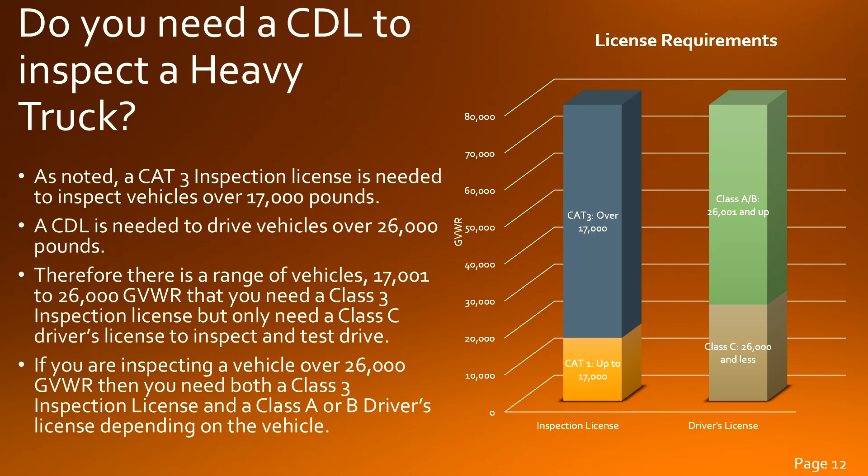In addition to having to have a CDL, there are also clarifications regarding endorsements. Notice what it says in the manual: the inspection mechanic shall have a valid driver's license for each class of vehicle which the mechanic will inspect, except that a certified mechanic who inspects a school bus is not required to hold a school bus driver endorsement. So, for example, if you're inspecting a school bus, you will need to have a bus endorsement, a passenger bus, but you do not have to have a school bus endorsement because there will not be school students on it when you're inspecting it.

But there are other examples where, an empty tanker trailer, if it's still placarded, you would need to have that hazmat endorsement as well as a tank endorsement. Bulletin 19-07, which was from 2019, and a more recent one, Bulletin 25-04, provide further clarification about this.

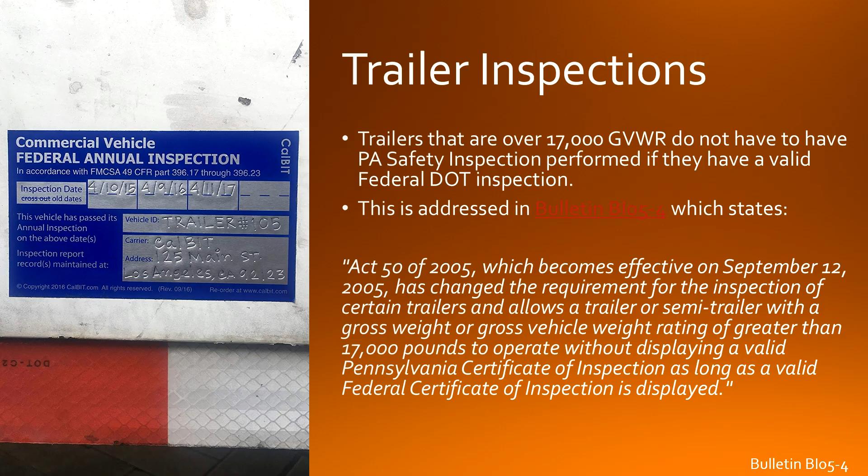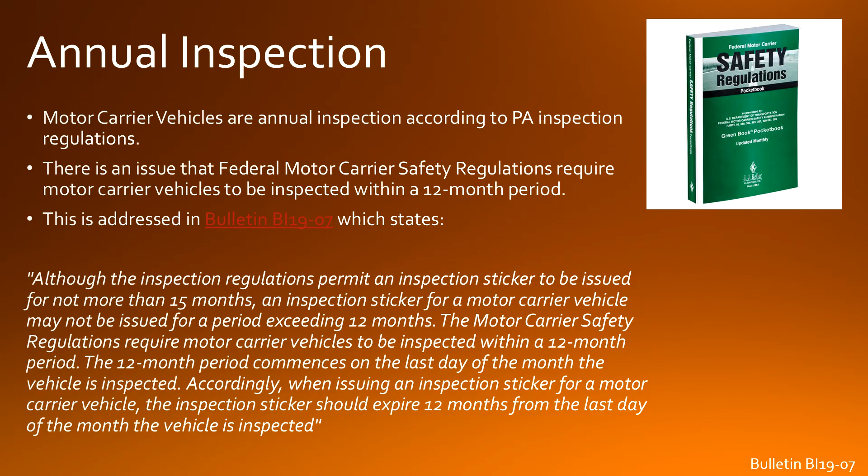There's also another tricky thing in there with that. Our inspection allows vehicles to be inspected up to 3 months ahead of time, which for a passenger car allows it to be inspected as long as 15 months. The wording is a little bit the same for heavy trucks, but there is a federal regulation that supersedes it, and that's the motor carrier regulations, which require that our motor carrier vehicles, aka heavy trucks, be inspected every 12 months. So even though our PA law would seem to allow doing it up to 3 months early and being able to give a 15-month sticker for any motor carrier vehicle, which would be a heavy truck over 17,000 pounds, it can only be inspected for a maximum of a 12-month period. So whatever month you're inspecting it in, that is the same month it will expire a year later.

The majority of the inspection requirements for our Cat 3 vehicles is found in Subchapter F. If you're studying for the test, that's where you're going to want to spend most of your time. That applies to medium and heavy trucks, buses, and school buses. Just like other subchapters, there are two sections to it.

It begins with equipment requirements from page 43 to 51. Those are the regulations that the vehicle must meet to drive on roadways in Pennsylvania. They're enforced by police, law enforcement officers, DOT officers. The inspection procedure, what the mechanic is going to be performing when it comes in for inspection, begins on page 51 and continues to the end of the subchapter. Those are the reject-if criteria that the inspector or mechanic is going to check for.

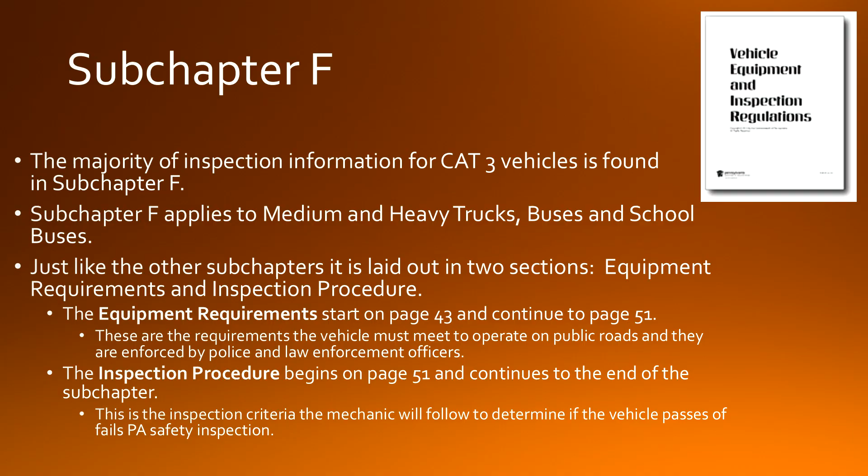It is noted too that you should be following that in order. That was in one of the most recent PA inspection bulletins, that you should start with verifying the ownership and the proof of financial responsibility or insurance, and you would end with the road test. So try to follow it in the order laid out in that chapter.

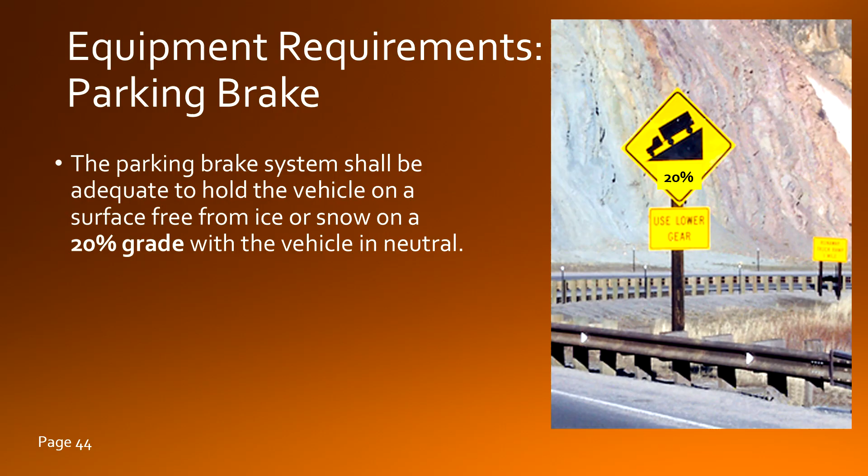We're only going to be hitting the highlights, some of the things that are different for our vehicles. On page 44, in equipment requirements, you can see it has a requirement for the parking brake. It says the parking brake shall be adequate to hold the vehicle on a surface free from ice or snow on a 20% grade with the vehicle in neutral. So that's how we check our parking brake. We don't apply it at any given speed. It's saying that if it's a truck on a 20% grade, which is relatively steep, in neutral, not in park, the brake should be sufficient to hold it.

There's also wording on page 44 that in the current edition of the manual is still incorrect. If you want to make this correction in the book, it currently reads that a tire may be equipped. It should actually say that it may not be equipped. That's how it's worded with passenger cars and all the other vehicles. They omitted the word 'not' in the more recent editions. Even though we don't often see studded tires on our heavy trucks, they may not be equipped with studded tires that exceed, with projections exceeding 2/32 inch. So they can be sticking out 1/32 or up to 2/32, but they cannot stick out beyond that.

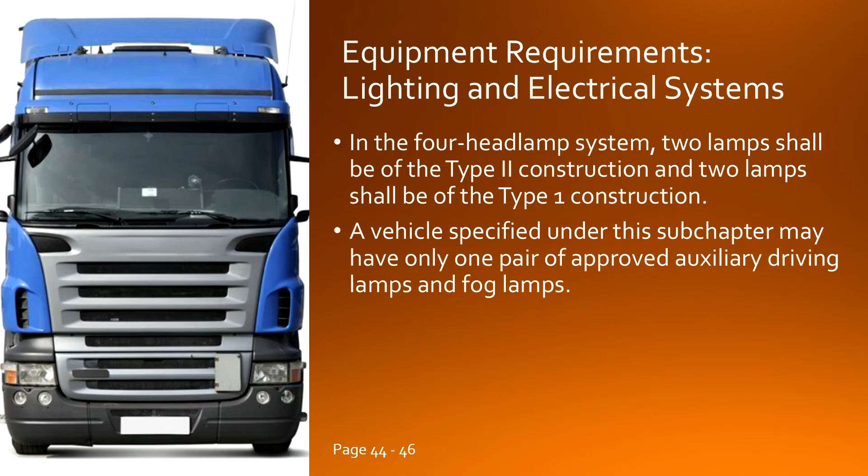In the lighting and electrical requirements, it talks about the headlamp system. If it's a 4 headlamp system, 2 lamps shall be of the type 2 construction, 2 lamps shall be of the type 1 construction. Back in the appendix of the manual, it addresses what those different lights look like. It also says a vehicle like this can only have 1 pair of approved auxiliary driving lights and fog lamps. So you can't have 4 fog lamps across the bottom; you could only have 2 fog lamps and 2 auxiliary driving lamps in addition to the headlights.

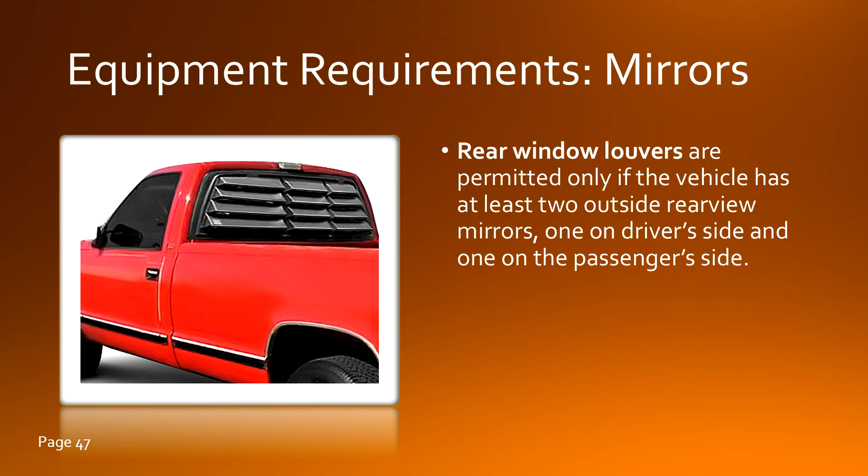There's wording about a wood plank bumper when it comes under the chassis. Wood plank bumpers would only be permitted on a road service truck or wrecker, and even then they should be attached to either a regular bumper or equivalent steel backing. They should not solely be wood.

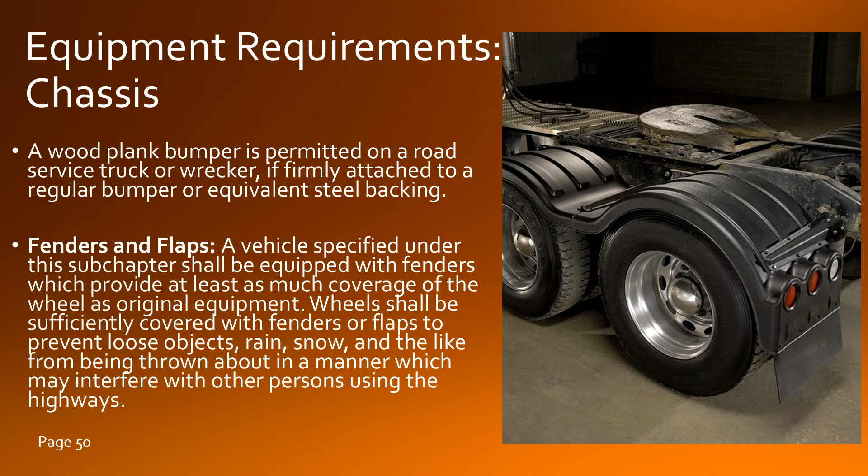There is requirements for fenders and flaps. In this picture, we can see fenders placed on a heavy truck. A vehicle in this subchapter needs to have wheels sufficiently covered with fenders or flaps to prevent loose objects, rain, snow, and the like from being thrown out on the highway or on other vehicles. There is a requirement for it. If you look at the rear wheel shields on page 51, it says a vehicle specified in this subchapter, except the truck tractor while towing a trailer, because the trailer is essentially going to block that same thing.

If it's bobtailing, it would need this though. Shall be constructed or equipped with mud flaps or wheel shields to bar water or other road surface substances thrown from the rear wheels of the vehicle or combination at tangents exceeding 22.5 degrees, measured from the road surface, from passing a straight line to the rear of the vehicle or combination.

So this picture hopefully clarifies it for you. What they're talking about is a 22.5 degree angle coming off the back of that tire, and you kind of project a line from that. So the closer the mud flap is to the wheel, the further it has to come down to catch anything that would come off at 22.5 or greater angle.

Some flatbed trucks might stick the body out far enough that it would catch that line and no mud flap is required. So you can see there, depending on my distance from the wheel, the mud flap has to come down and catch that. I have heard a tip that some mechanics have gone to a hardware store or plumbing store and bought a 22-degree angle, maybe for PVC pipe, and stuck two 3 or 4 foot lengths of pipe in either end and lay that next to the wheel.

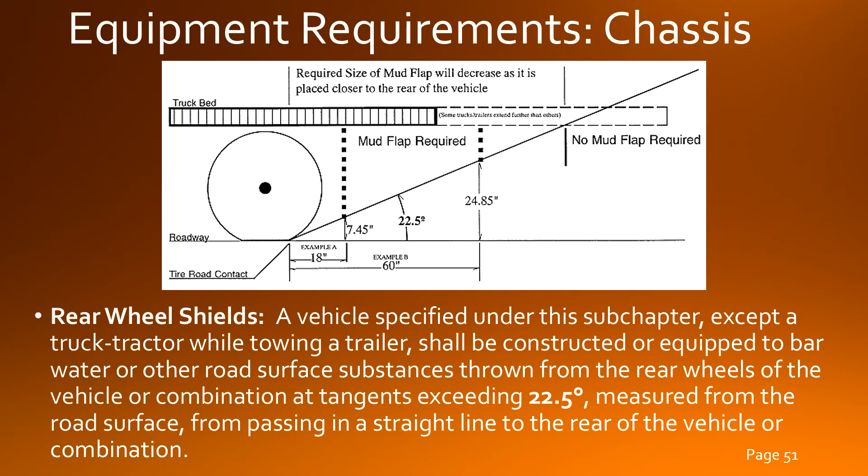Now, a 22-degree bend is actually 22.5 degrees, same as this requirement. If they lay that flat on the ground, they can kind of use that pipe as the projected line and determine if the mud flap falls where it needs to be. There are also other charts where it says, if the mud flap is X amount behind the wheel, it needs to come within this distance of the ground. So you could either use a gauge like I described or reference those charts to check for this.

Now we get to the inspection procedure on page 51. The majority of what you're checking is identical to passenger cars and light trucks. So we're going to try and hit on the highlights that, maybe it's the same wording, but it's checked differently, or it's something unique to our trucks, such as the items regarding air brakes. So we're not covering the entirety of the inspection procedure. We're assuming you already have that level of knowledge. This isn't meant to replace the inspection course. This is meant to only add to it what you need to know for heavy trucks found in Subchapter F.

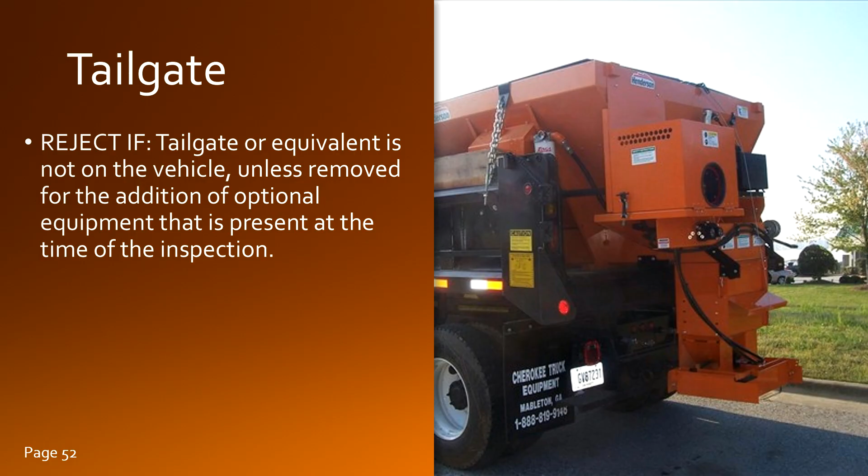First thing on there, on page 52, is the tailgate. It says the tailgate basically needs to be on the vehicle. That would be rejected if it's not on the vehicle, unless it's removed for the addition of optional equipment that's present at the time of inspection. So in this picture, a salt spreader would be a perfect example of that. There's some equipment, maybe a lift gate, that's meant to essentially replace the normal tailgate. If that equipment is present and properly attached, then that does not need the tailgate at that time. Now, if they would remove the salt spreader from the body of this truck, they would need to reinstall the tailgate before it can be driven on the roads or pass PA safety inspection.

For outside mirrors, it states to reject if it does not have a mirror with minimum reflective surface area. So notice that on all of our vehicles over 10,000 pounds, that is 50 square inches. So these vehicles need the larger mirrors. They need to meet that requirement. Not saying you need to measure this and calculate for every mirror. If it looks like the standard normal size that you're used to, it would be acceptable. But if it is smaller or looks questionable, yeah, you're going to have to get a tape measure out and do some math to figure out the surface area.

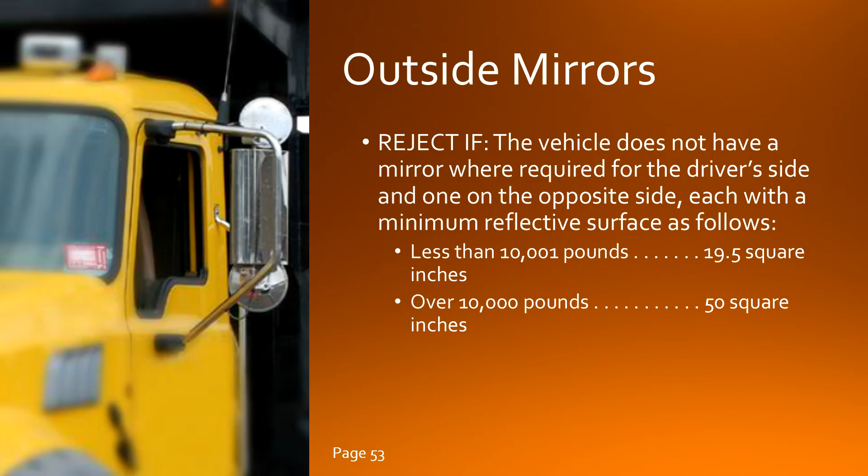Here we're seeing the rear wheel shields, the mud flaps again. We had already seen that in equipment requirements, but here's the reject if. It says if it's not equipped with rear wheel shields or mud flaps as required under PA code. I already explained that PA code basically is looking at a 22.5 degree angle, and anything that would come off at an angle greater than that needs to be caught by the body or the shields or mud flaps. Notice it goes on to say that there cannot be any lamps or wiring attached to any guard or flap. We're talking about not the bracket, but the part that swings. There can't be lights on the bottom or any wires zip tied to it. And the guard or flap has to be of suitable strength.

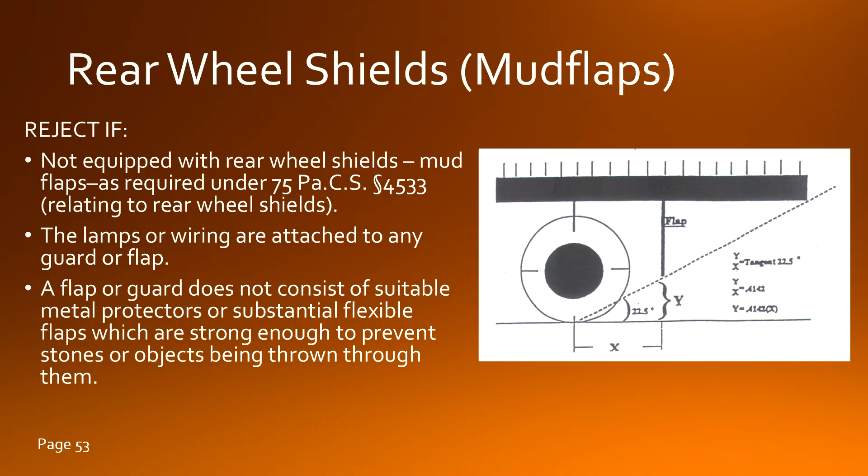Notice it says reject if it does not consist of suitable metal protectors or substantial flexible flaps strong enough to prevent stones or objects from being thrown through them. This doesn't mean the mud flap cannot be a mesh material. Some are a really tight mesh that allow water or wind through but will catch any rocks or objects thrown through. But you can't have cardboard or a rag or a mud flap with large holes that won't catch objects.

On buses, they have some special criteria applicable to their handrails. Now, I know you may not be planning on inspecting buses, but understand that your license will permit you to do this, so you need to be familiar with these requirements.

It says reject if the step well is cluttered or worn to present a tripping hazard. So where they get onto the bus, there can't be a box, a lost and found, or the metal protectors or rubber mat presenting a tripping hazard, can't have holes in it or something that'll trip people up.

It goes on to say the guardrails or grab rails can't be loose or have fastening parts missing, so there can't be any screws missing. They have to be secure.

The service doors cannot bind, jam, or malfunction, preventing proper operation. They basically have to work smoothly, work freely.

The emergency exit is not easily accessible -- again, they can't have a large box or lost and found or something stored in the way of the emergency exit. They can't have an additional seat added blocking it.

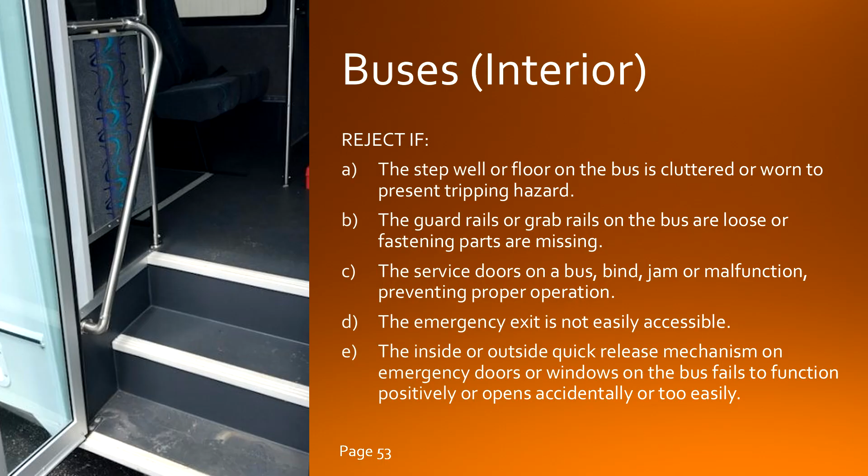Lastly, it says the inside or outside quick release mechanisms on the emergency doors or windows of the bus fail to function positively or open accidentally or too easily. So basically, the emergency exits have to latch properly and work easy enough. We're not talking about windows you have to break out, but the ones that are latched and you would open up, or the hatch in the roof -- it needs to open properly.

Lamps and lenses have identical wording to what we saw in the passenger cars subchapter, but might have a little different application. It says exterior bulb or sealed beam, if originally equipped or installed, fails to light properly, except ornamental lights. If you remember, ornamental lights are not legal on roadways -- they're lights that do not serve a legitimate purpose.

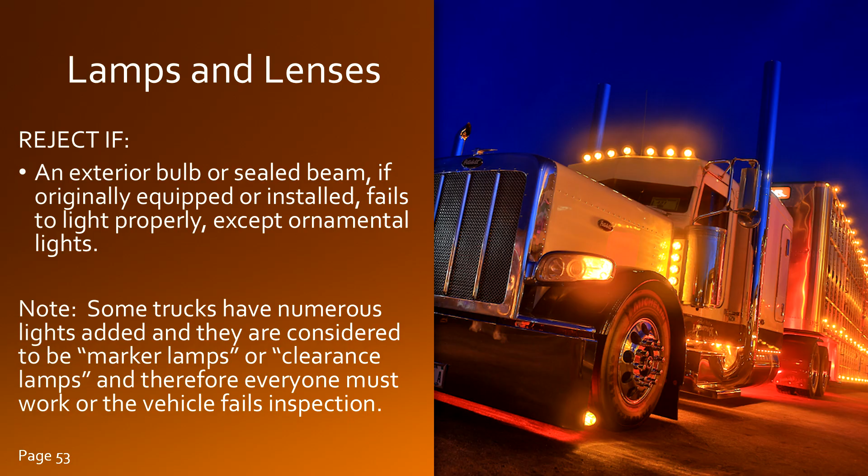They are wrong color -- we see some trucks with what they call chicken lights, where they add a lot of lights to the vehicle. In most cases they are designed to be clearance lights, the right color, the right locations, which makes them legal. However, since they are marker or clearance lamps, they now have to work for inspection. So even if a truck has 100 lights down the side, if one of them is out, that now fails inspection unless it's an ornamental lamp.

In some vehicles they have an exterior inspection light switch that can make your life easier. That will basically activate the lights and flash them in a certain sequence, so you can use that during your inspection to check them. It's meant for the driver to help during a pre-trip, but it can be helpful to you as a technician as well.

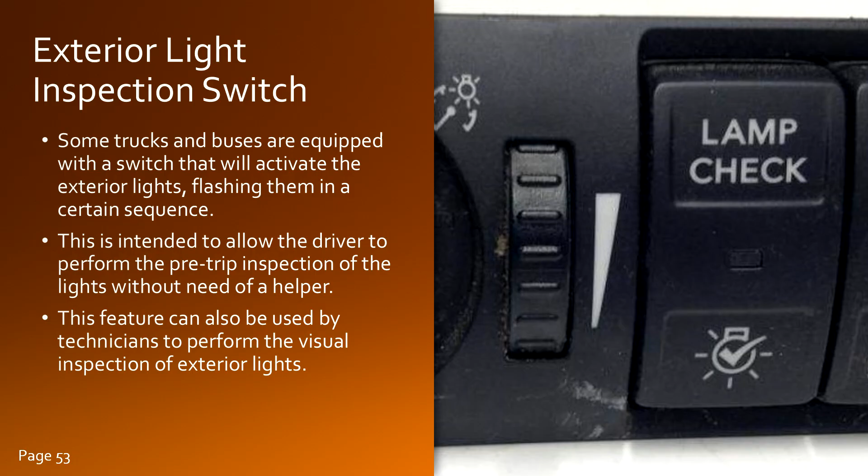So PennDOT issued guidance in 2018 in this bulletin, BI 18-01, which basically allows you, the inspection mechanic, to make a judgment call on the LED lamps -- are they working properly, are they emitting enough light to be safe? PennDOT did provide guidance that said if half of the diodes are out, that light should fail.

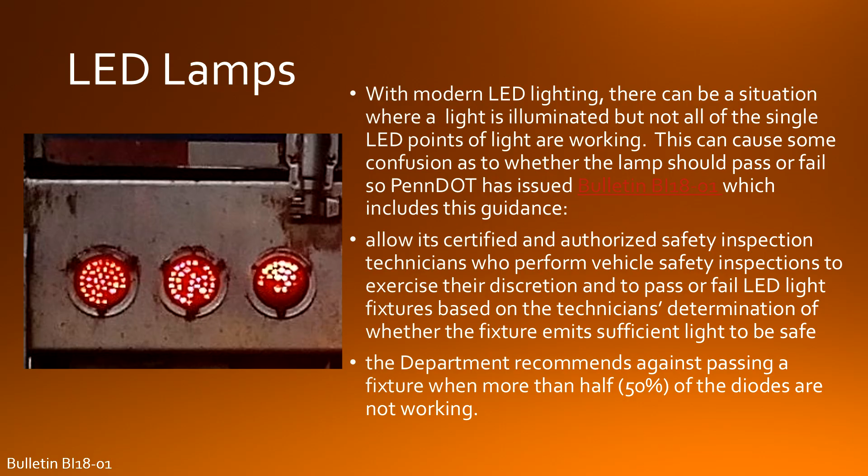Now the lamp on the right, the LED there, absolutely I think should fail. We are not covering the whole pattern, the whole circle, and it's less than half the LEDs lit, so that one would fail. So in this one picture, you can see an example where one should definitely pass, one maybe a judgment call on your part, and the far right one definitely should fail.

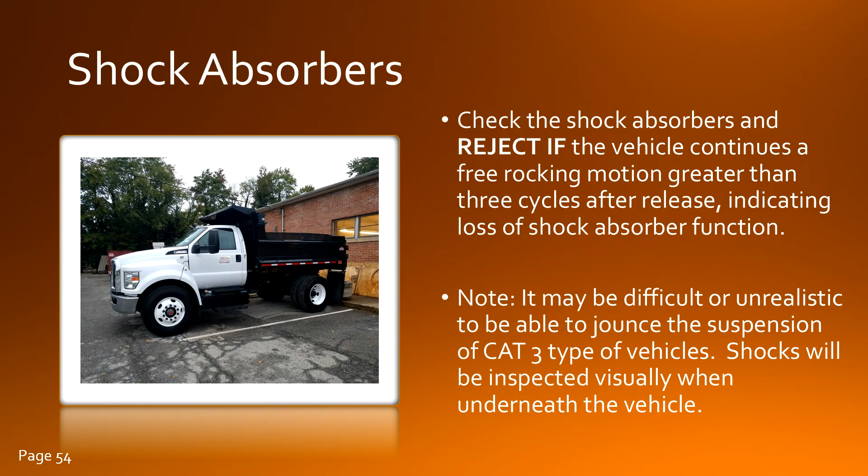Page 54 of Subchapter F talks about checking shock absorbers, and again this matches the wording we saw for light duty vehicles. But if you think about it, for a medium and heavy truck, it might be a bit unrealistic that you're going to walk up to the front or back of that truck and start it bouncing and count the number of cycles. Really, you'll do a visual inspection as part of underneath the vehicle, and maybe you'll notice a bouncing shock on a road test, but for a heavy vehicle, you're not always going to be able to get it bouncing as they would have described there.

The fifth wheel assembly has two criteria. It says the lower half of the fifth wheel is not securely affixed by U-bolts or by other secure means, and the lower half of the fifth wheel is cracked, loose, missing, or has inoperative locking devices. Keep in mind, the upper half of the fifth wheel is on the trailer, so the lower half of the fifth wheel is everything we have on the truck. That is what you'll be inspecting.

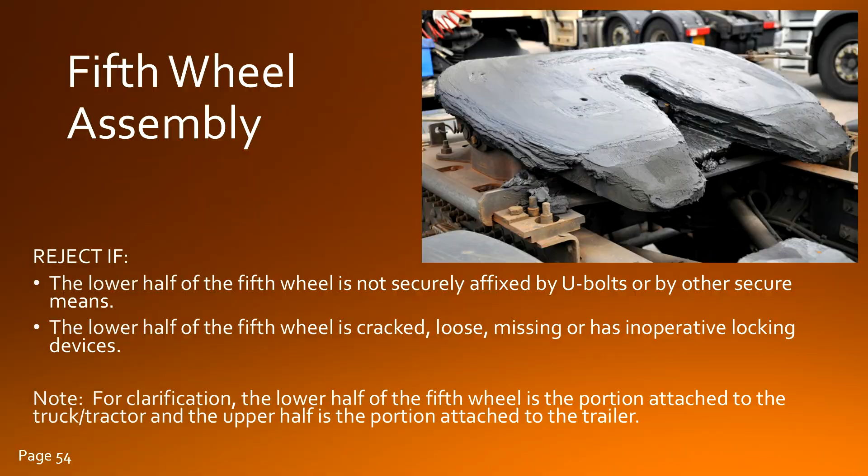To help you with that, we have this 3-minute video clip with a demonstration of what we will be checking. First line item: the lower half of the fifth wheel is not securely affixed by U-bolts or by other secure means. First off, the lower half of the fifth wheel is everything you see right here on this tractor. The upper half of the fifth wheel is what's on the trailer, the pin, the plate, the part that's welded in. So we do legally have to inspect this to make sure that it is securely attached.

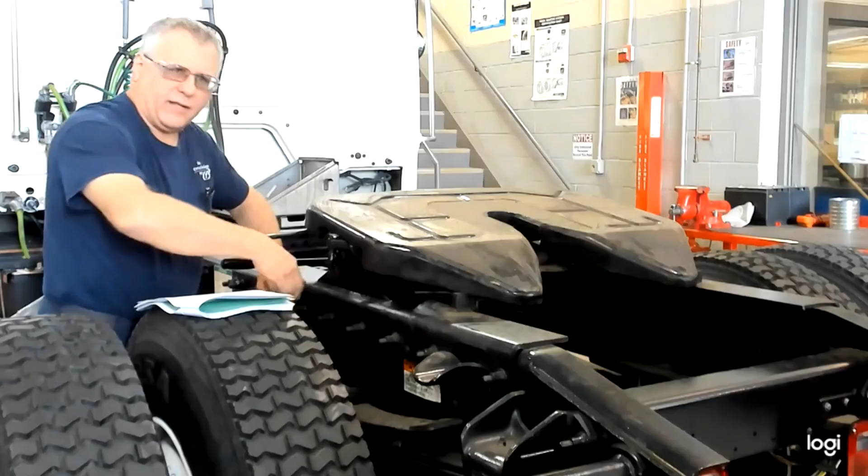So we look at welds, we look at the huck bolts, make sure nothing's loose. If it has grade 8 bolts, hard washers, make sure that they're not loose. Look for rust stains or streaks. If the plate is off of the frame, try to pry it, see if you get any movement whatsoever. If it has U-bolts, they have to be tight. You shouldn't be able to move or wiggle them.

It may need to be retorqued if it is loose. Huck bolts, if they're loose, have to be replaced either with a new huck bolt, cutting the old one off, or replace it with grade 8 fasteners, bolts, washers, and locking nuts. So we check both sides, look at the inside and the outside for those rust stains.

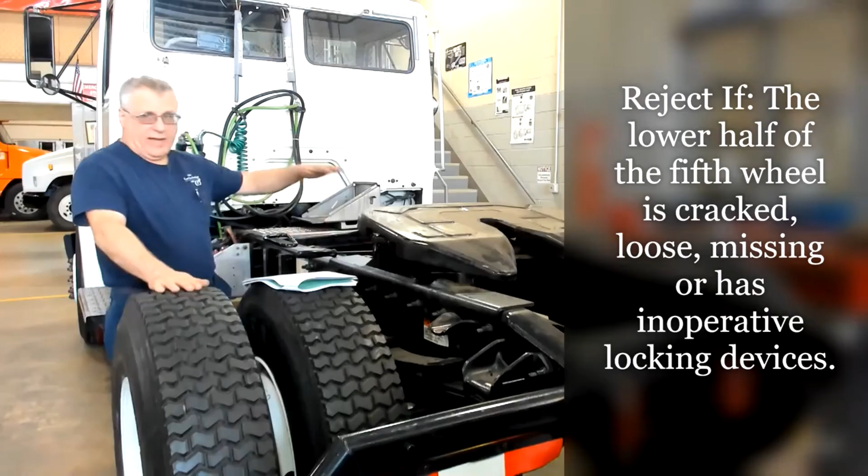The second item then is reject if the lower half of the fifth wheel is cracked, loose, or missing. So if it had a fifth wheel, it'd crack up in the top here, or any of the attaching points had a crack, and we want to flip this fifth wheel up through the inspection.

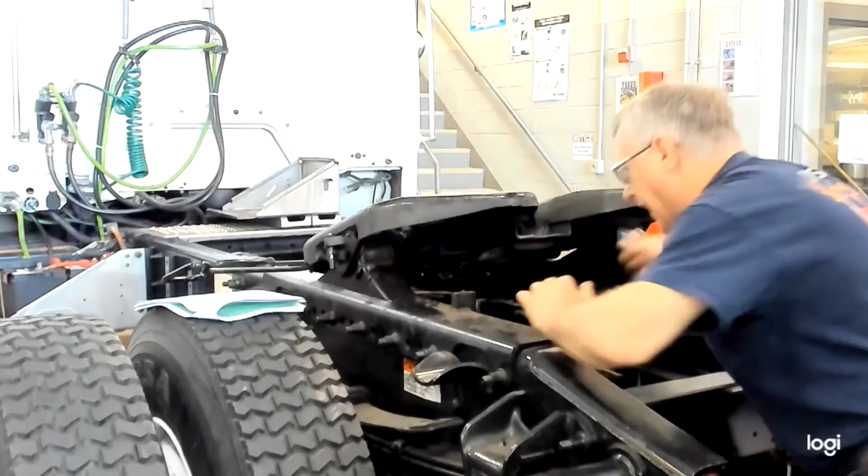Both ends of it, get a light underneath there. You can take a pry bar, get underneath of them bushings, and pry it. No movement there. Remember, missing pieces could be as simple as a cotter pin in a securing pin.

On the inside, sometimes I'll have a roll pin or a cotter pin. And then the last thing, you want to make sure that the locking device works. The easiest way to do that is with a pry bar, keep your fingers out away from the jaws. You want to apply pressure to the locking mechanism and let the jaws close. It should fully retract the handle. The jaws should come over, lock into place, and then you should be able to unlock it.

So those items are what you need to do to inspect the fifth wheel. Now this one's been cleaned, there's no grease on it right now, but to check for cracks in the upper plate, you may have to wipe it down. Be careful of sharp edges and whatnot. And you check for cracks up there. Remember, look underneath and check there just as well as you do on the top. The stuff hides underneath there. So that's it. That's what you need to do to inspect the fifth wheel.

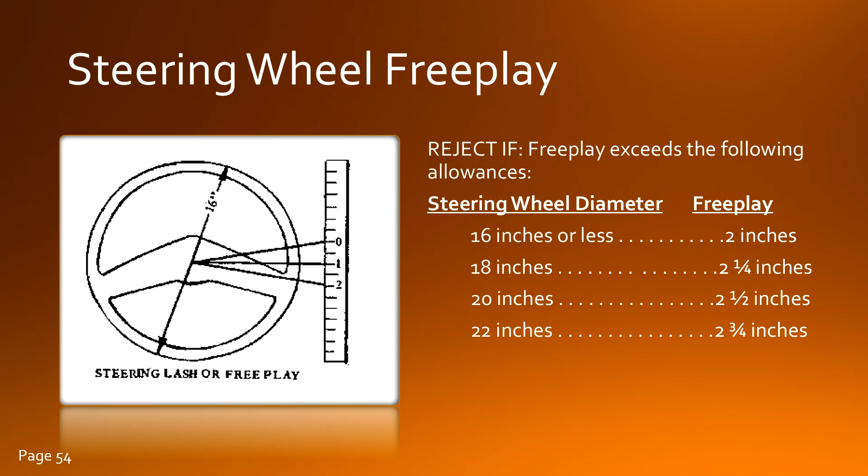For the steering column, this one is a little different than our light-duty vehicles. It states that you'll reject if the front wheels cannot be turned to the full right or left position without binding or interference. So you turn it all the way lock to lock, fully left, fully right, making sure it goes to the steering stops and doesn't bind. What is different here is that it's not saying it needs to be an equal number of turns left and right—that might vary on a heavy truck. That is not part of the rejection criteria for these vehicles.

The steering column, if it's an energy absorbing column, should not be defective, meaning it shouldn't be collapsed and slide up and down if it's not meant to do so. The U-bolts that attach it under the dash, or positioning parts, cannot be absent or loose. It does go on to say that some steering columns are designed to permit some movement, possibly floating up and down—if that's how it's designed, that would be acceptable.

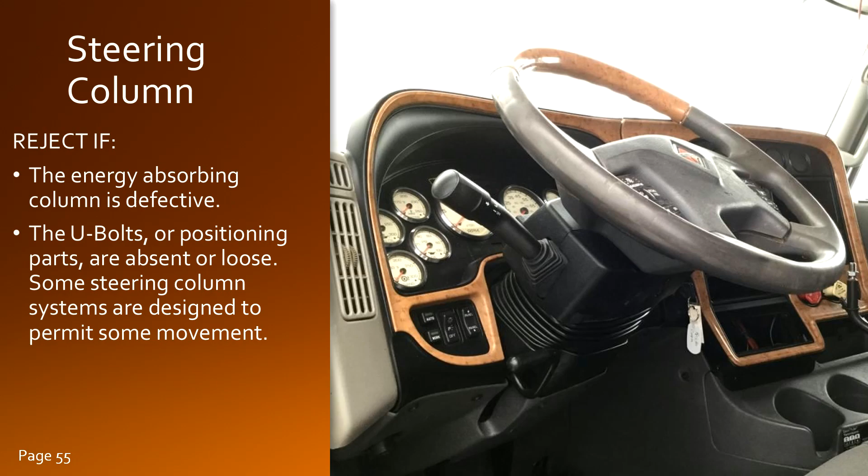The horn—now this is the same wording. It says the vehicle cannot be equipped with a siren, bell, whistle, or a device emitting a harsh or unreasonably loud sound, except on emergency vehicles and vehicles equipped with anti-theft. Now, I do want to point out there are some horns, sometimes called train horns, that would be illegal even on heavy trucks. They're too loud, excessively loud.

However, how do heavy trucks have air horns—legal air horns—that might cause a passenger car or pickup truck to fail? Well, if you think about the location of the horn on a heavy truck—and they do need them because they have greater stopping distance—it's the location, it's on top of the cab. That's mounted pretty high in the air, we're talking 8 feet high, maybe a little higher. That's not the same as what it would look like on a pickup truck.

Some horns are mounted not on top of the cab, they might be mounted down underneath, but in that case they're usually pointing down towards the ground, or next to the vehicle—it's not going to be excessively loud. Now, if that air horn were installed in some stupid location pointing straight out the side, or if it's an excessively loud horn, yes, it absolutely should fail. This inspection manual does not go by a decibel reading—it points back to your judgment as a technician.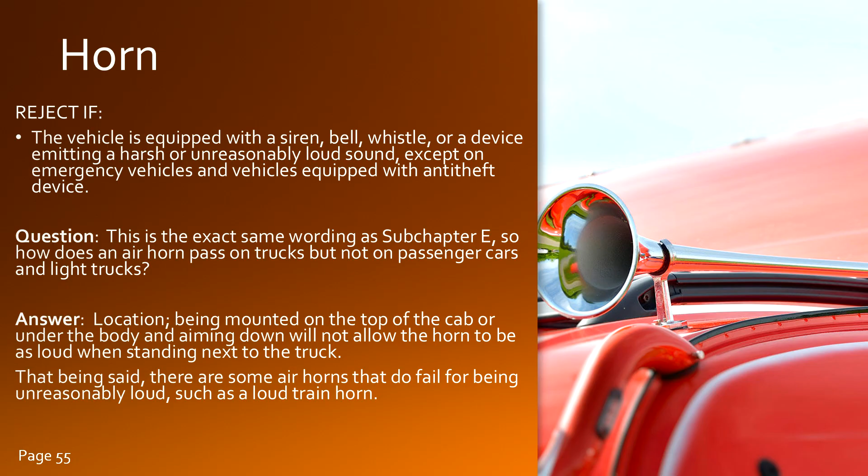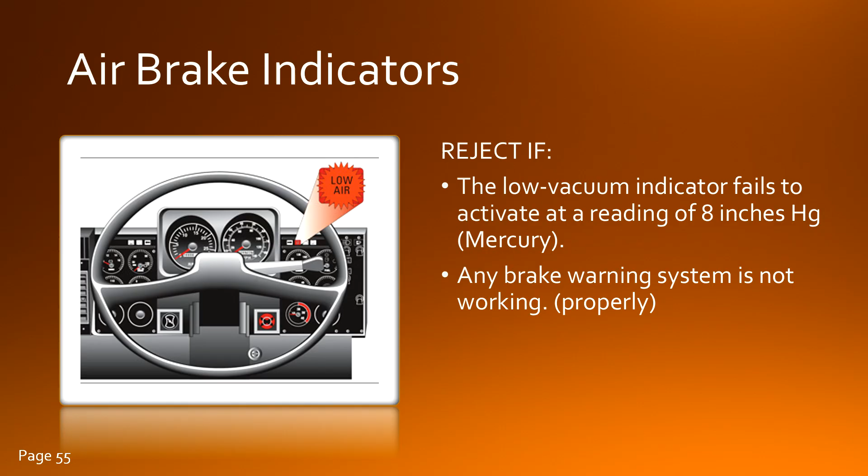Air brake indicators—this is an important one. It talks about the low vacuum indicator. We don't see that often, but that could be on a truck that has some type of vacuum booster. It'd be required to have a low vacuum indicator that has to activate by the time it reaches 8 inches of mercury or lower. Make sure you're aware of that spec—we don't see it often, but it's a test question that can pop up. It also goes on to say that if any brake warning system is not working properly—it could be assumed that brake warning systems need to be working properly.

From in the cab, we have a few reject-if criteria regarding the air brake or air pressure system. I want to point out that this does not match the same air brake criteria set forth by DOT or for CDL training. This is kind of unique, some of these specs to PA safety inspection.

So make sure you're familiar with this for the test, and know it's different than what you might check for a CDL type test. The first one listed says, with the engine stopped and brakes not applied, you're going to release the parking brake, push in the valve in the dash, and make sure the wheels are chocked so it's not going to roll away. Make sure that gauge does not lose more than 3 psi per minute. The wording in the manual says 3 pounds, but really it should say 3 psi per minute. So you watch the gauge for 1 minute and make sure it doesn't drop more than 3 psi.

Then they say you should have the engine running. Make sure the gauge indicates a loss of no more than 4 psi per minute after full brake application for 2 minutes. You'll have to let it run until it reaches governor cutout, otherwise it's going to build air instead of losing air. Then apply the brakes fully, full brake application from the pedal, with the parking brake still released.

The 2 minutes means you might have to wait up to 2 minutes for the pressure to stabilize. On a combination vehicle with a trailer hooked up, it may take a little time for that pressure to stabilize, but in most cases it won't take 2 minutes. As soon as that pressure stabilizes, start your timer, then watch the gauge and make sure you don't lose more than 4 psi per minute.

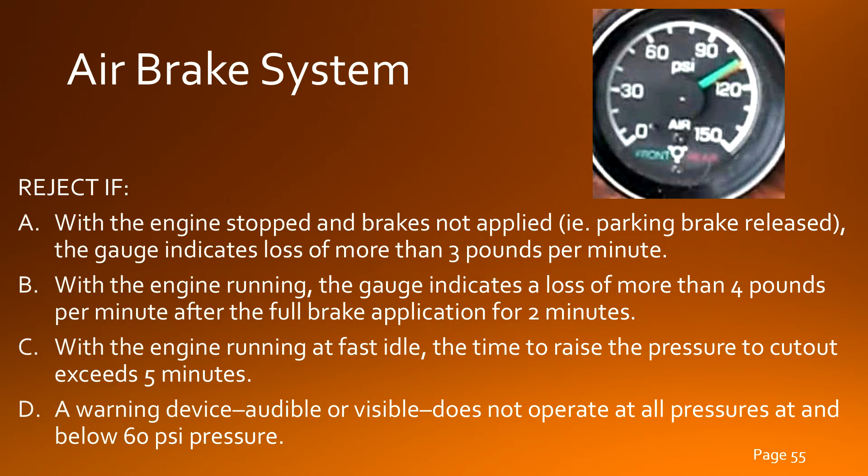One of the first items it says is, any brake warning system is not working. We will be checking that during this process, but just to show you real quick, when we turn on the key, you'll hear a buzzer — that's our low air buzzer. You also saw a lamp there; it went out because our air pressure is not low right now, but that is the low air pressure warning light. On this vehicle, it looks like a circle with 3 arrows pointing inwards, indicating pressure.

One of the first checks in the inspection procedure for air brakes says, with the engine stopped and brakes not applied, the gauge indicates a loss of 3 pounds per minute. You'll notice on this truck we have 2 air pressure gauges. The top one has the letter P, that's our primary, and below it we have a secondary air pressure gauge. They should be very close to the same, but because we have 2 systems, we have 2 gauges. On some vehicles you'll see a single gauge with 2 needles of different colors — on this one, the orange needle is the secondary, and the white needle is the primary.

To do this test, it said with the engine stopped, not running — that's taken care of — and brakes not applied, meaning not pressing on the service brakes, but also that the parking brakes must be released. So make sure the wheels are chocked, which we did prior to starting this video, and we're going to release our parking brakes.

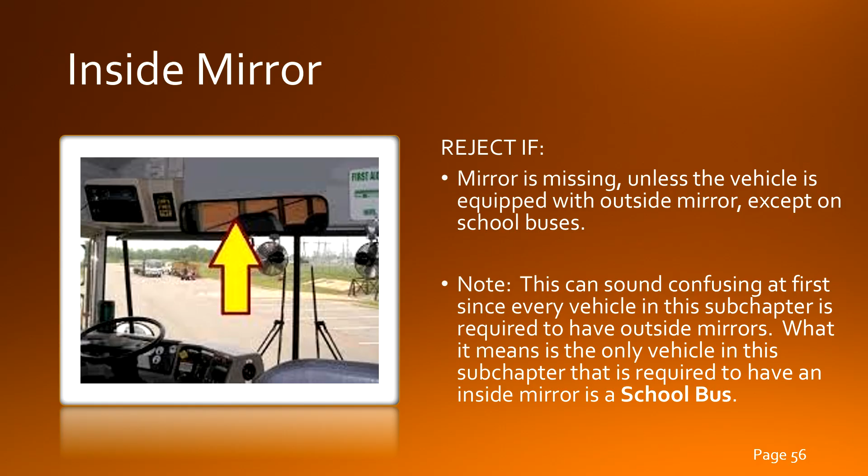For our medium and heavy trucks, there is a rejection criteria for an inside mirror. Little strange wording here. It says reject if mirror is missing, unless the vehicle is equipped with an outside mirror, except on school buses. So all of these vehicles have to be equipped with an outside mirror. What that's actually saying is the only vehicle required to have the inside mirror is a school bus. If that's not there on a school bus, it would be rejected.

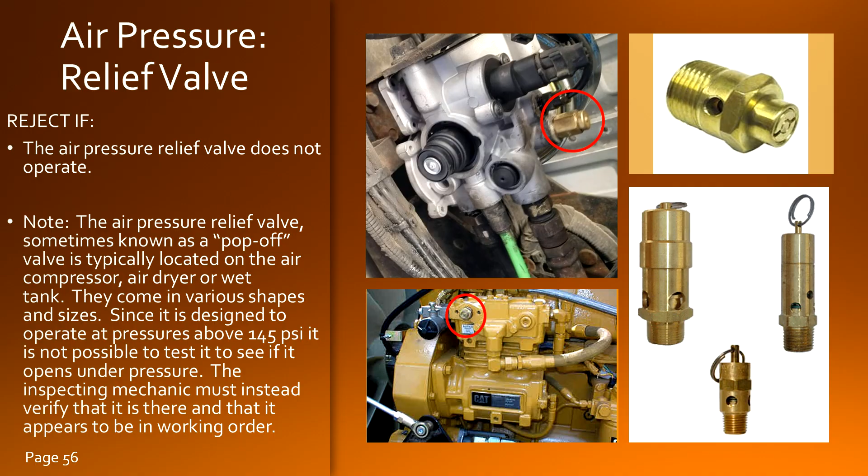The air compressor: reject if it's a belt-driven compressor and the belts are worn, loose, or frayed so as to prevent proper operation of the compressor. Now, most heavy truck compressors are gear-driven, so that would not apply on those. There, you're going to make sure the air compressor doesn't have loose mounting bolts, and doesn't have a cracked, broken, or loose pulley.

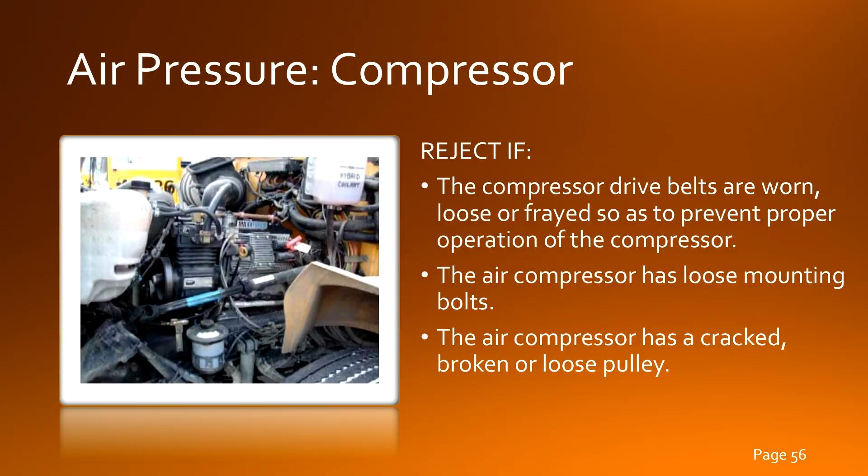On the air compressor, you also want to check the air intake cleaner. It says reject if the air intake cleaner is clogged, as that would prevent proper air intake.

Many air compressors draw directly from the intake manifold or the engine air filter housing. That's a rather large filter, and if it was blocked up, they would notice engine performance loss long before they'd notice anything with the brakes.

Those small air filters are obviously small in capacity, and they're notorious for being neglected. No one's checking them, no one's cleaning them, they get ignored, and they get so caked up with dirt and mud that there will be a loss of pumping in the air compressor.

This would also probably affect the buildup time to reach governor cutout in a quick, timely manner. Make sure if this has a separate air filter that you're checking it and make sure it's not clogged.

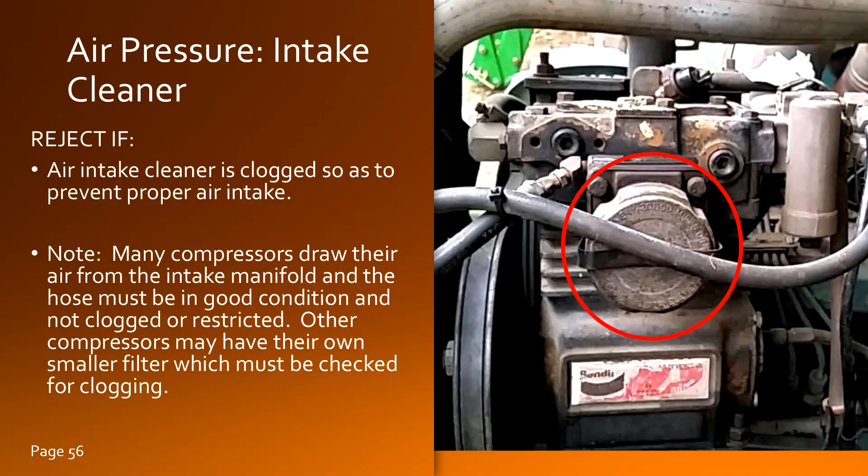On the air brake system, it says reject if the brake hoses seep or swell under application of pressure. They shouldn't balloon up, and there shouldn't be air seeping through them.

It also says that it's rejectable if the connecting hoses are improperly joined. So if a splice is made by putting hose ends over a pipe or tubing with hose clamps, that's rejectable.

Now, with our air brake system, it is acceptable for us to use compression fittings on our brake lines, our tubing. That is a little different than hydraulic brakes, which operate at much higher pressure than air brakes.

On hydraulic brakes, compression fittings are unacceptable, but on air brakes, which operate at basically a maximum of 130 psi on some trucks, it is acceptable to use compression fittings.

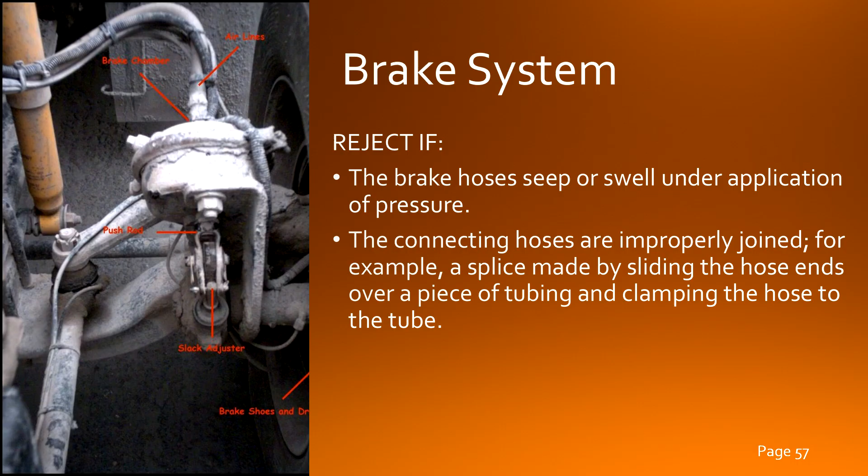On the tires, a lot of the same criteria as our light-duty vehicles, but there is a difference when it comes to the steer axle.

Minimum tread depth is still 2/32 for most wheel ends, except for the steer axle. The wording in the inspection manual specifically calls out the front tires, which typically would be the steer, but the wording is the front axle.

You have to have a minimum of 4/32 tread on those vehicles for anything over a gross vehicle weight rating of 10,000 pounds. That would include a few light duty vehicles, since they go up to 11,000 pounds, and it includes all of our medium and heavy duty vehicles.

You're going to check the diameter of duals. They need to be within 3/8 inches of each other, otherwise one tire is carrying an unequal amount of load compared to the other.

You really want to check for this if you have different tread depths on them. If you have a new tire next to a worn out tire, it could easily be a difference of more than 3/8 inch diameter, which is rejectable.

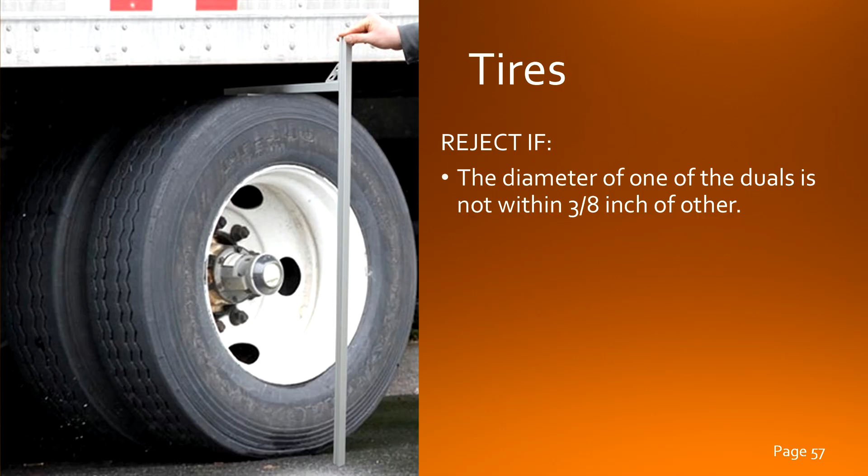You also want to reject the vehicle if the tire's tread extends beyond the outer edge of the wheel housing, inclusive of fender flares, or exceeds the manufacturer's specs as to size. Some vehicles, I think of front load cement mixers, some of those front tires, even from the factory, will stick out a little beyond the body.

If that's how it's designed, that's acceptable, if that's the manufacturer's specs. But if it's changed, it should not go beyond the outer edge of the wheel housing or fender flares.

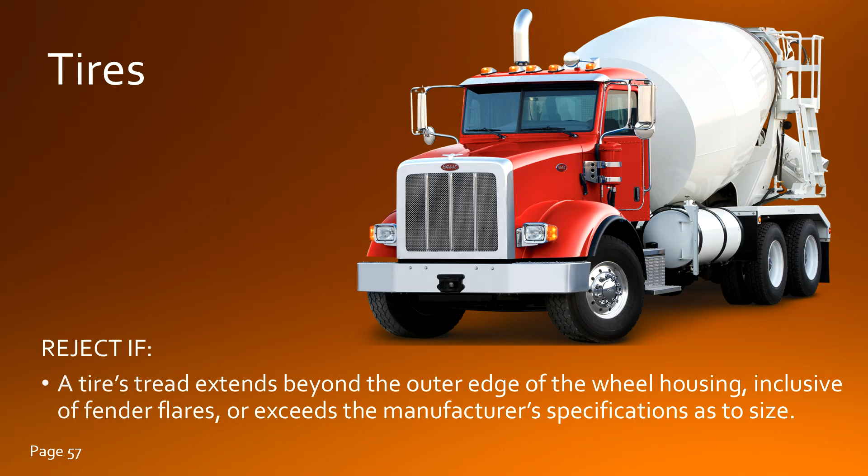It says reject if the wheelbase on one side differs from the wheelbase on the other side by more than 1 inch. Again, this is the same wording as in our light duty vehicles. It does not specify, though, when we have a tandem truck or multiple axles, which axles we're measuring to.

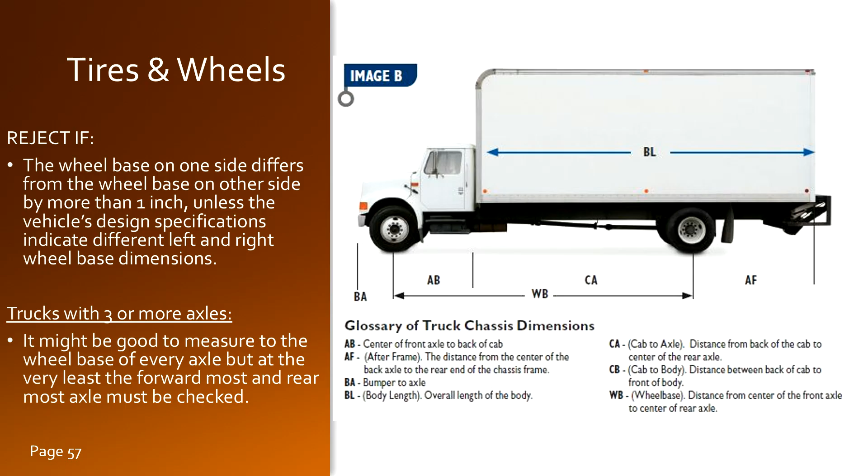At the very least, I would say you should be measuring from the forwardmost to the rearmost axle. In practicality, it's probably best to check every axle for this. Make sure it's not off by more than 1 inch, because that will throw off the thrust line and will greatly affect tire wear.

Studded tires have the same dates as light duty vehicles. They cannot be in use after April 15th or before November 1st. Also, any axle that has missing wheels or rims is rejectable.

That could apply to duals, where you would only have one wheel installed when it's meant to have duals. It could also be a lift axle. The lift axle on there might not be touching the ground, but it still needs to have wheels and rims on it.

And it's also rejectable if a tire is smaller than the manufacturer's recommended minimum size, or less than the recommended load rating. So make sure we're checking the tires for sufficient load rating for the vehicle they are on.

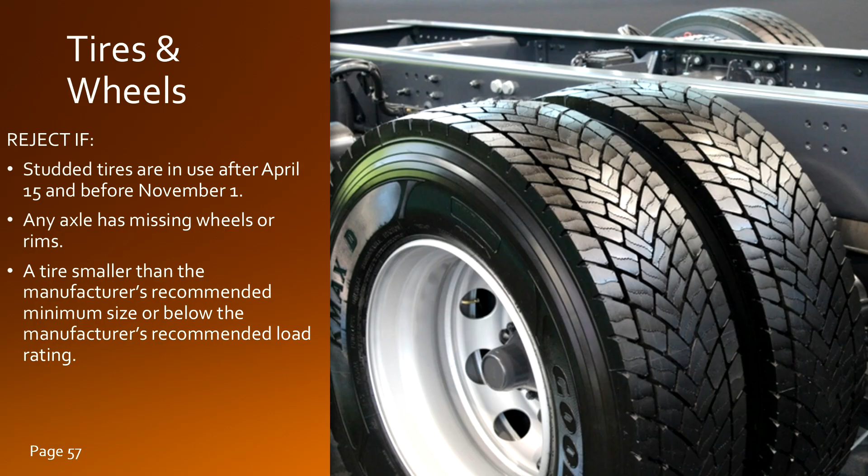If our rims are 16 inches or under, you're allowed a quarter inch. If you have a 17 or 18 inch rim, you're allowed 3/8 inch of movement, measured at the edge of the tire. And if you have an over 18 inch rim, which is most heavy trucks, you're allowed up to a 1/2 inch, which is quite a bit.

They also say to make sure any looseness detected is not wheel bearing free play. You can eliminate wheel bearing free play by applying the service brakes. But in my experience, most trucks are far less than that 1/2 inch spec, or whatever the permissible amount would be, and if that's the case, you don't have to eliminate wheel bearing free play, since eliminating it would only make the measurement smaller. So if I measure it and it's a 1/2 inch or a little more, I'll eliminate wheel bearing free play to confirm it's the steering linkage and not the bearings. But if it's allowed to be a 1/2 inch and I only have 1/8 inch, it already passes, and I don't need to eliminate the wheel bearing free play.

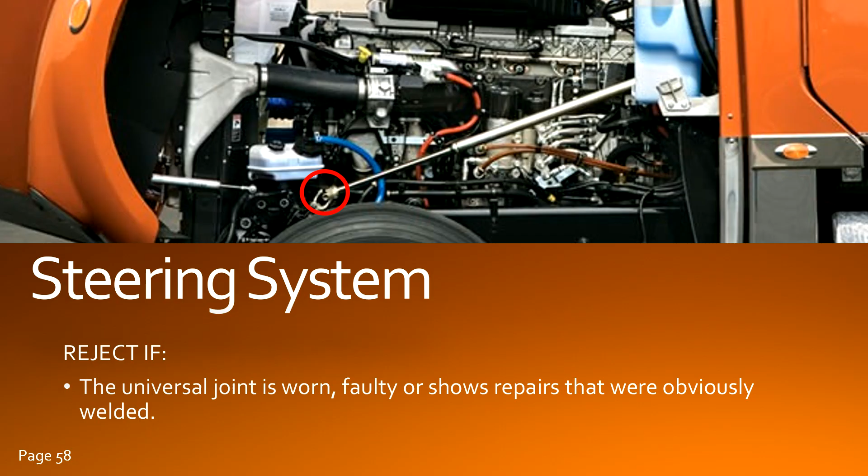Reject if the universal joint—this is referring to the steering system universal joint on the steering shaft, you might have one or more than one U-joint in there—is faulty, shows repairs that were welded, or is cracked or mangled.

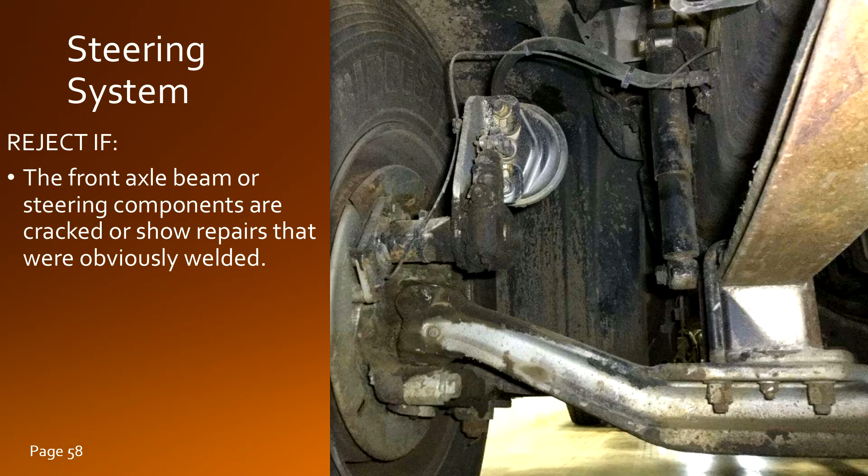Underneath the vehicle, check the front axle beam and steering components. Make sure they're not cracked and don't show repairs that were obviously welded. It is unsafe to repair any steering components—they shouldn't be welded, and a JB weld would be even worse. If there's anything you can see like that, it is rejectable. When steering components are damaged, they need to be replaced, and that includes the front axle beam.

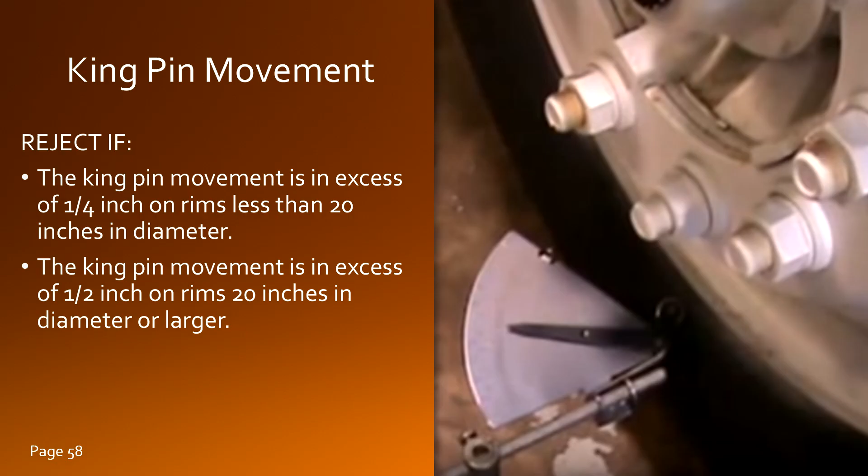Most kingpin manufacturers recommend using a dial indicator to inspect the kingpins. However, for safety inspection, Pennsylvania gives a different specification and does not reference manufacturer specs. Pennsylvania states that for kingpins on rims less than 20 inches, you're allowed a 1/4 inch of movement, and on rims 20 inches and larger, you're allowed a 1/2 inch of movement.

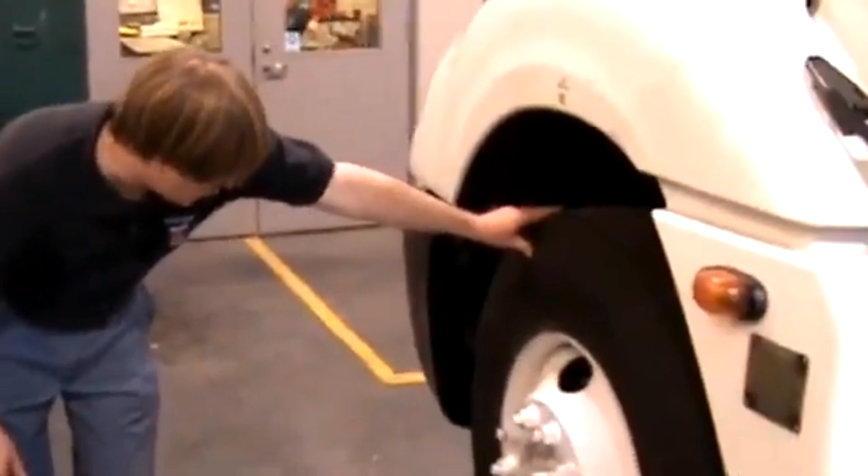As you can see here, we have a 22.5 inch rim that we're going to demonstrate measuring the kingpins on. You want to begin by jacking up the truck and positioning the tire just a few inches above the ground like we have here. One of my recommendations is to center one of the openings of the wheel at the upper position, the one without the valve stem, which will allow you to rock the wheel back and forth easily. We're going to take a pedal depressor, go in the cab, and apply the brake pedal.

By applying the brake pedal, we have a dual benefit of eliminating the wheel bearing movement at the wheel end, but also keeping the wheel from rotating while we try to obtain our measurement.

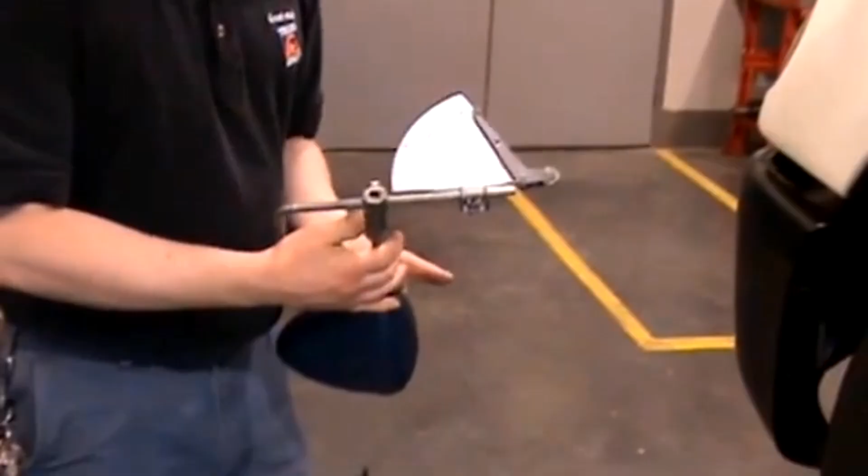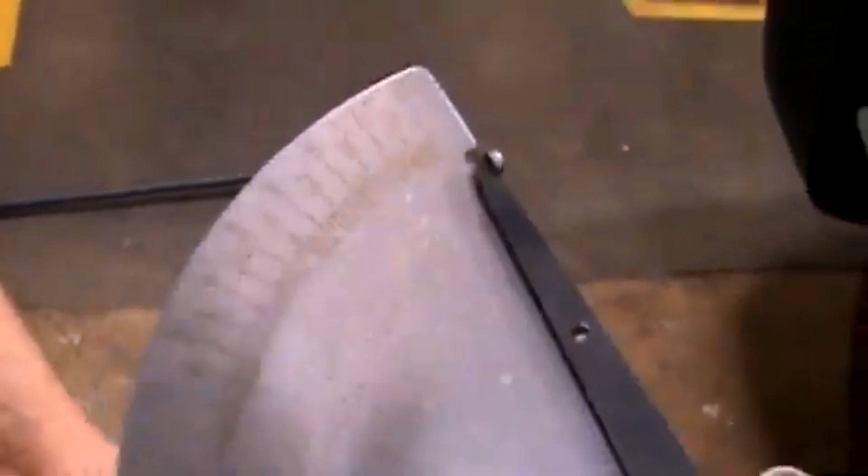We're going to be using this kingpin gauge, or it's an old style ball joint gauge. As you can see on the gauge, it reads in thousandths of an inch increments, each line being a thousandth of an inch. I'm going to take this, position it on the ground, and push it in against the bead of the tire. Notice I'm not going on the rim because it's a thin edge and could slip off, but I'm positioning it right below there on the bead, and I'm pushing it in until the pointer is in the middle of the gauge at the 0 point.

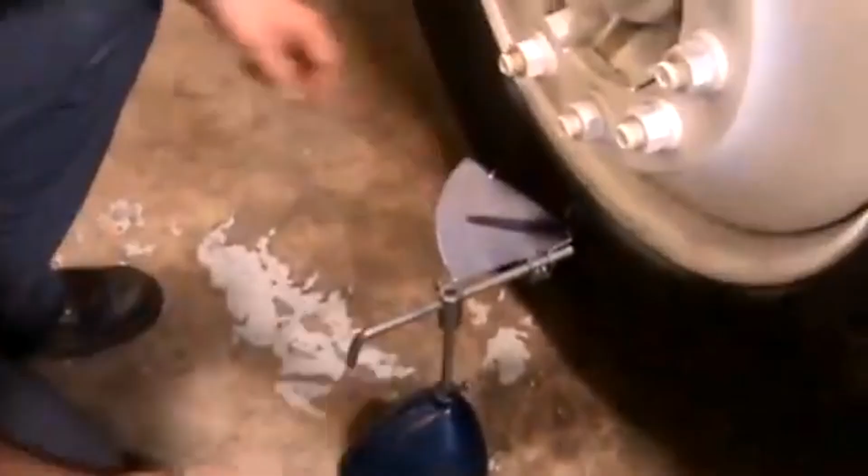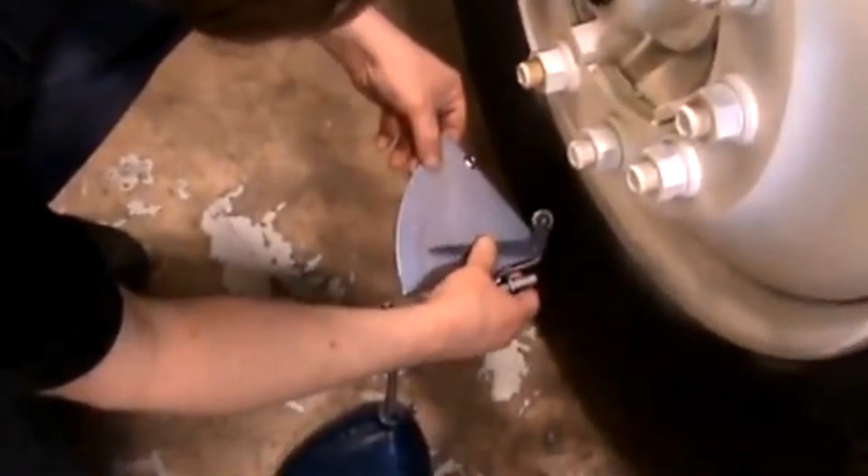Going to take a bar, position it in my wheel assembly, and then rock my tire up and down, applying upward pressure and downward pressure. You can see on this wheel we're getting about 30 thousandths of movement. This is well within specifications. For this tire, Pennsylvania regulations would allow a half inch of movement, which if you look at the gauge, would be needle travel from this point to this point — considerably more travel. That is how you inspect kingpins per the Pennsylvania regulations.

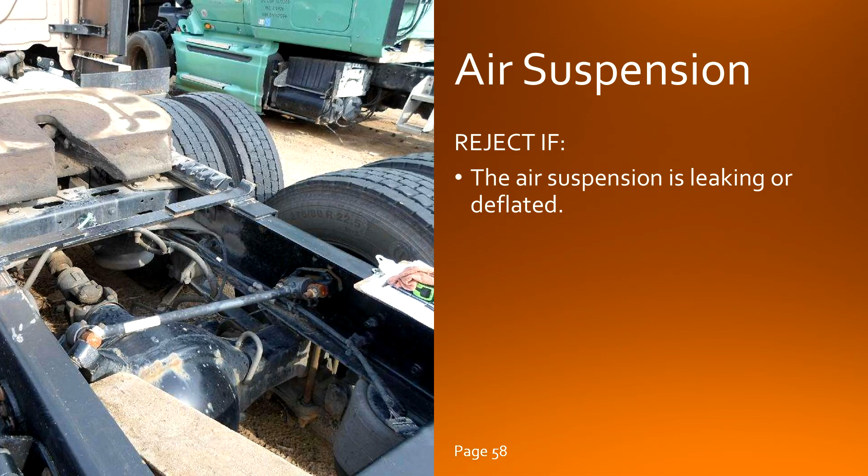On the air suspension, this is the only criteria we see: it's rejectable if the air suspension is leaking, so air's coming out of it, or if it's deflated and doesn't air up at all — that would be a fail.

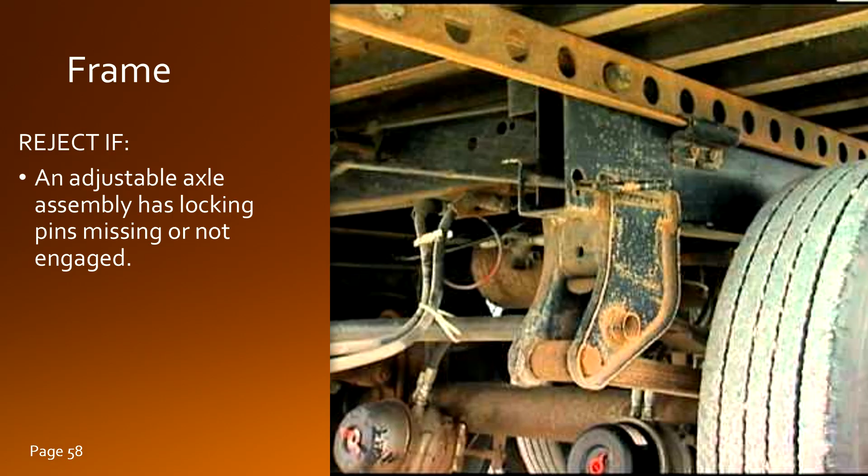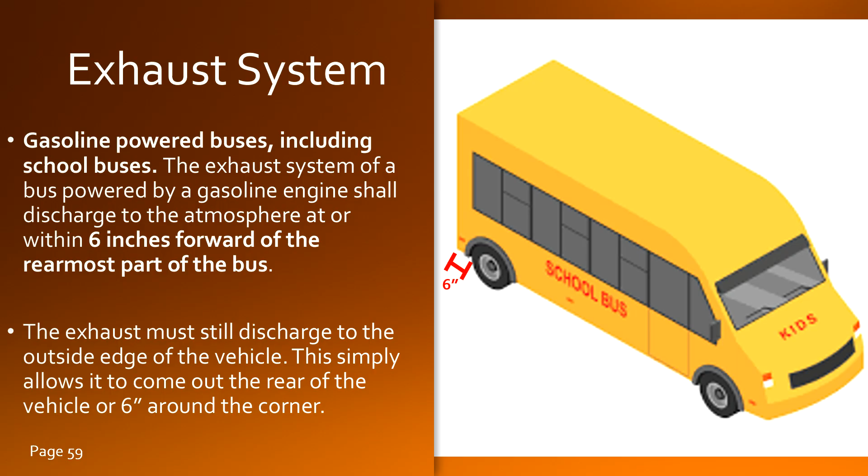The exhaust system wording can be a little confusing, so I want to point out that this part on page 59 is talking about gasoline-powered buses, which includes school buses. What it says is that the exhaust system of a bus powered by a gasoline engine shall discharge to the atmosphere at or within 6 inches forward of the rearmost part of the bus. So this is not saying the exhaust can stop under the vehicle. They're saying it can come out anywhere along the back edge at the back bumper, or 6 inches around the corner on either the left or right. So you have a small portion back there where it could come out the side, but it's got to be within 6 inches of the back of the vehicle.

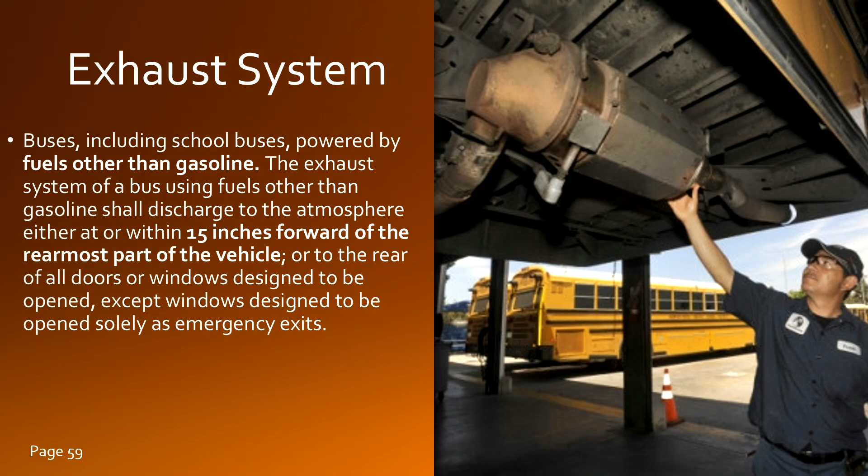For diesel-powered buses, they word it as fuels other than gasoline, which could include others like CNG. The exhaust can discharge either at or within 15 inches forward of the rearmost part of the vehicle — so now we have a 15-inch corner to work with — or to the rear of all doors or windows designed to be open, except windows designed to be open solely as emergency exits. So let's say the windows stop 3 feet short of that corner of the bus, which you can actually see in the background of that picture — a bus similar to that. It could come out anywhere in that range; it wouldn't be held to the exact 15 inches mentioned earlier.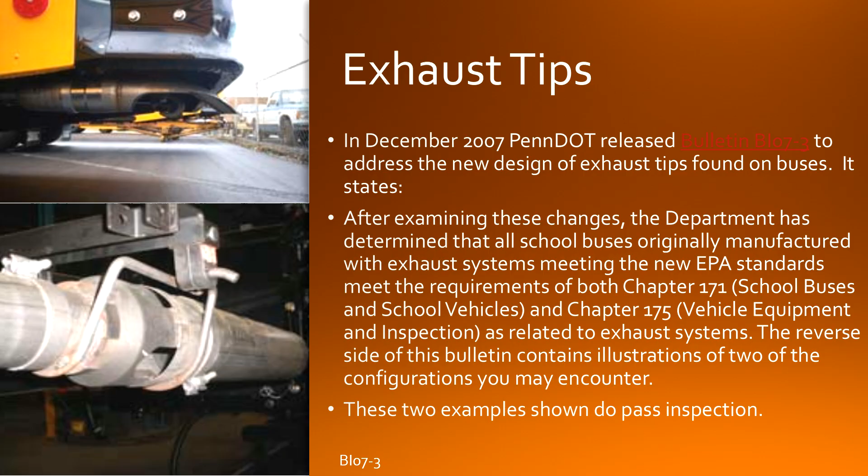Now, that tip needs to be on there — it can't be cut off or have fallen off. That would not be considered going to the outside edge if it was missing.

Brake system inspection wording is a little different than our light-duty vehicles. Here it says to remove at least one front and one opposite rear wheel. However, it's not necessary to remove the wheel and drum assembly if there is a removable backing plate that allows examination of the brake system, which a lot of our air brake drum brake systems, foundation brakes, S-cam brakes, will have. So if that's the case, you do not have to pull the wheels.

You do need to remove those backing plates, the shields, to get in there and inspect them, check for proper lining, check drum condition, and do an inspection. I do want to mention that air disc brakes are out there. I posed this question to PennDOT, and air disc brakes do not fall under that rule for removable backing plates. They do not have removable backing plates, so you're really limited in what can be inspected when the wheel's installed. So if it has air disc brakes, yes, you must remove the tires and wheels on one front and one opposing rear wheel location.

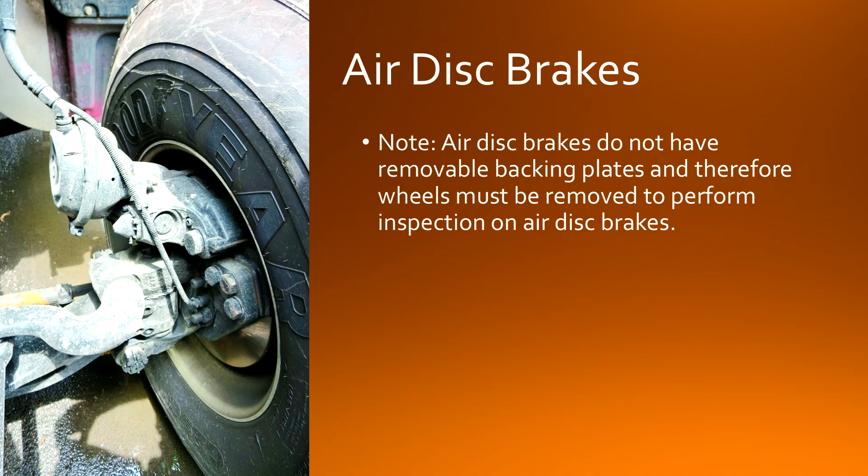On the air brakes, reject if there's air leaks in the air brake system valves, diaphragms, or piston cups. So you don't want any air leaks. Make sure you're checking brake chambers, and make sure it's not coming out the hole, that the diaphragm in there is torn or leaking.

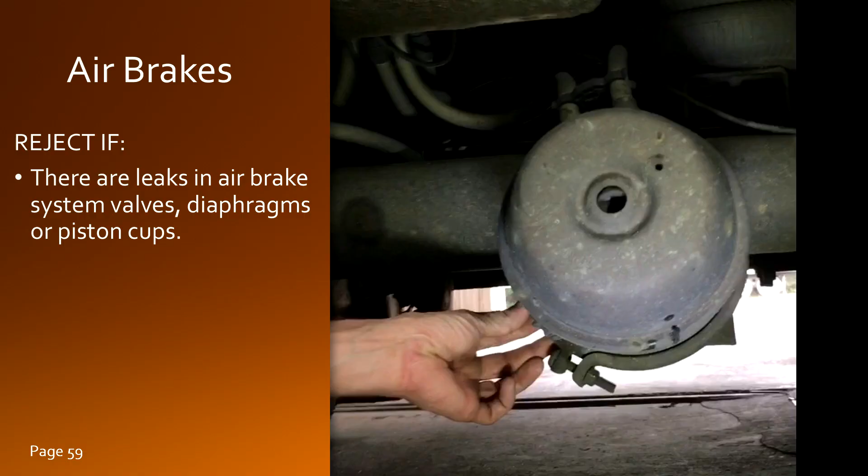Brake drums, you're going to measure them just like you would light duty, but notice the scores are allowed to be significantly more. These drums are allowed to be scored up to 60 thousandths, can't be deeper than that. Drum diameter can't be larger than 90 thousandths over original for a 14-inch or less drum, or for drums 14 inch or larger, it can't be more than 120 thousandths over original spec. So a lot of our S-cam brakes use 16.5-inch drums, meaning the discard size would be 16.620.

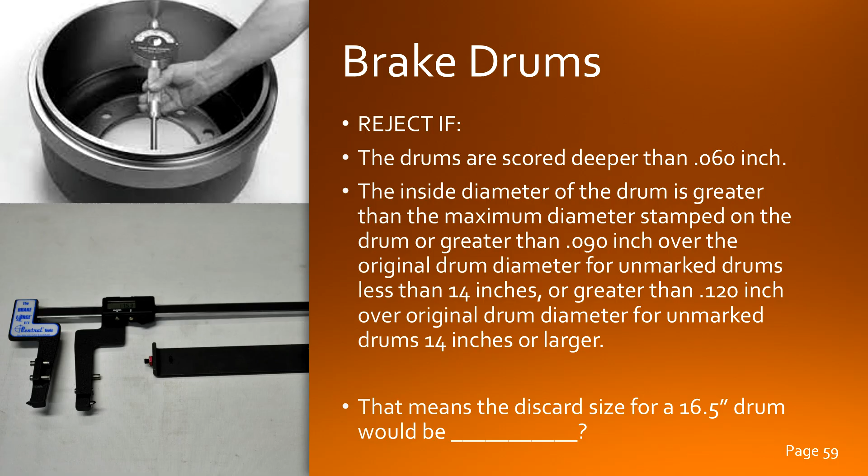Brake lining has similar specs for bonded: 2/32 is the minimum at thinnest point. Riveted is 1/32 at thinnest point, measured on top of the rivet head. Make sure you dig the dirt and dust, the brake dust, out of the rivet holes to measure that.

There is a new type of lining mentioned here. I don't want to say it's new technology-wise, just new, first mentioned in the inspection manual, and that's bolted lining. Some heavy-duty truck applications would have used this. I don't know that it's as common today, but bolted lining is measured at the center of the shoe, and that can't be less than 5/16 inch in thickness at the center.

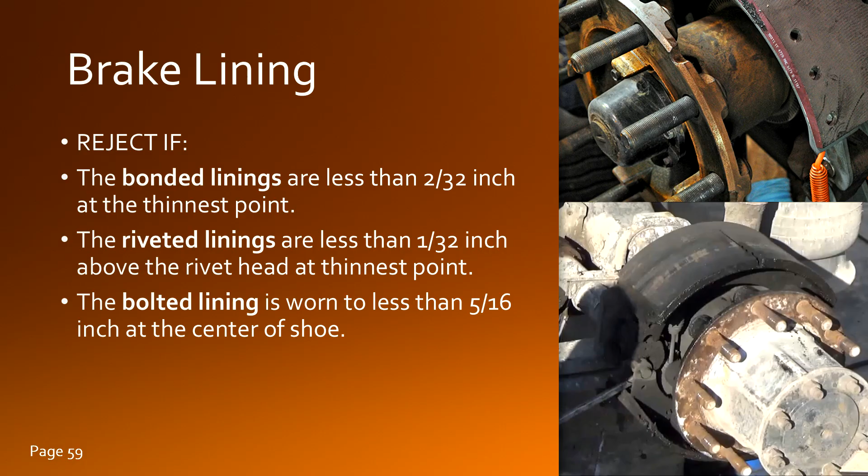Service brakes, on page 59, has two weird statements one after the other that, in my opinion, needs to be updated or combined, so that's what I did here. Basically, it says a truck or truck tractor with 3 or more axles manufactured after, originally they mentioned a date, but really July 24th, 1980, that is not equipped with service brakes on all axles should be rejected. They had until a later date to have that included, but that came and went a long time ago. So really, anything manufactured after that date in 1980 has to have service brakes on all axles.

For our steering axle brake components, it says reject if one or more of the following are mismatched across the motor vehicle steering axle. This is a good practice to have matched on every axle, but notice it's only rejectable on a steering axle. It says the air chamber size, meaning the diameter or type — if you have a type 24 chamber or type 30, they need to be the same across the axle. The slack adjuster length, and even what hole it's pinned in, should basically have the same length or leverage. That's important. And retracted push rod length should not differ by more than 1/2 inch. That's measured retracted, when the brakes are released. It should be within 1/2 inch to give equal geometry to the brakes and equal braking so the vehicle does not pull when the brakes are applied.

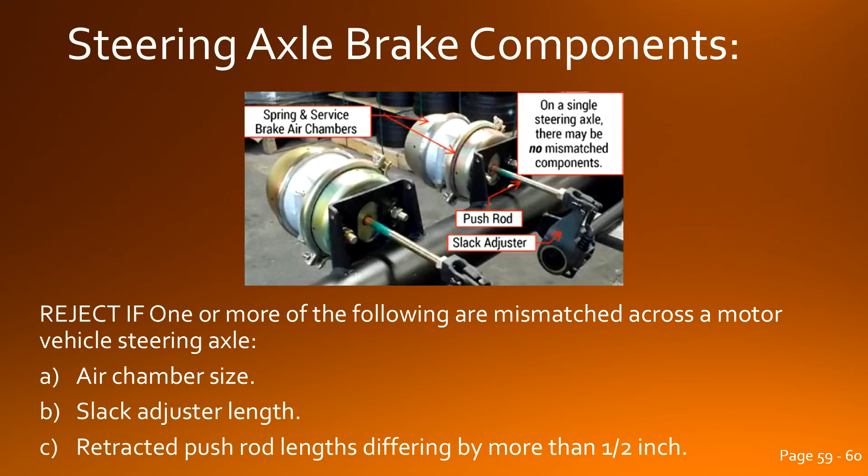On page 60, it talks about body mounts. They add an extra word here, saying to inspect critical body mounts. For light duty, we just saw body mounts — here, what is a critical body mount? Well, certainly anything holding the cab on is a critical body mount. Something that's holding just a fender and nothing more might not be a critical body mount. Again, you're going to have to make the judgment call on what's critical or not. But for the critical ones, the body mounts have to hold as required, and they cannot be broken, cracked, deteriorated, or missing.

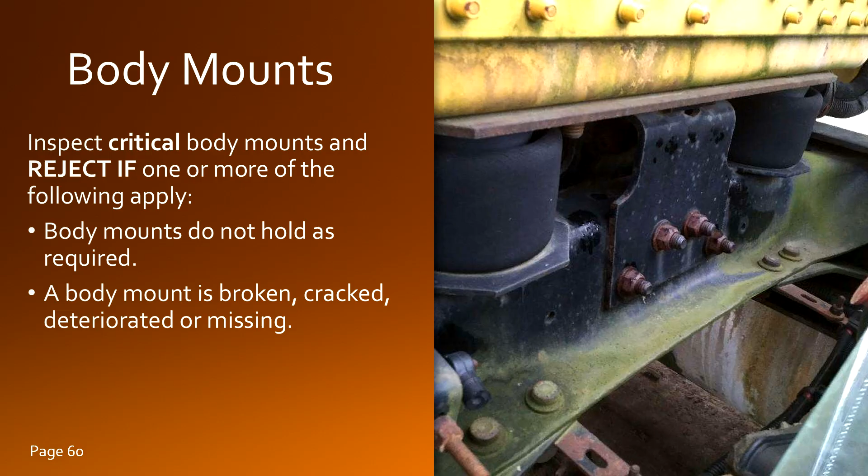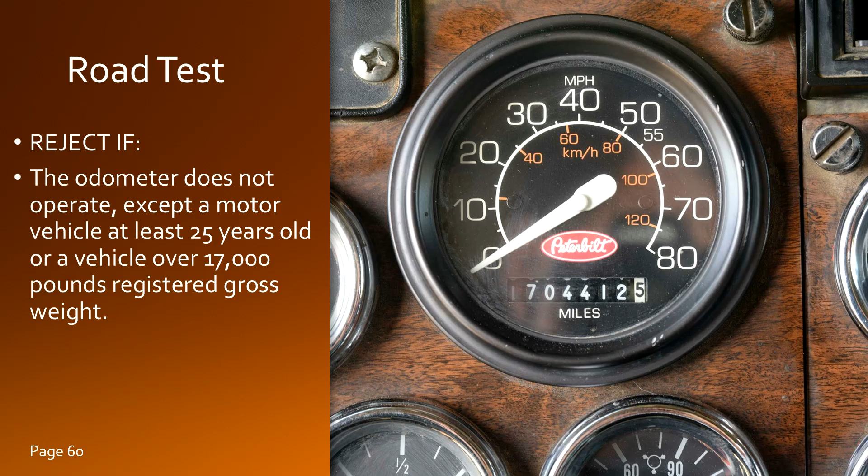These vehicles do require a road test, as we mentioned in the beginning. If it's over 26,000 pounds, you're going to need a CDL to take it out for a road test. During the road test, the odometer needs to work unless the vehicle is at least 25 years old or over 17,000 GVW. So heavy trucks do not have to have a working odometer for PA safety inspection. The speedometer still has to work, but some trucks might only be equipped with an hour meter instead of an odometer, and that's acceptable. The odometer only has to work on vehicles under 17,000 pounds and less than 25 years old.

Now, one thing I like to point out when I teach this is we didn't really see anything about brake adjustment, the free stroke or applied stroke of our slack adjusters. If you have a CDL, you know that's a critical part—they teach that as part of the pre-trip inspection. So why is it not rejectable? Well, think about it: since it's taught as part of the pre-trip, it's the responsibility of the driver to check that. I'm aware most trucks are equipped with automatic slack adjusters these days, but you still want to check them to make sure they're within stroke. If that automatic slack adjuster fails, and they do fail at times, it could be out of stroke and that brake might not be applying with proper strength. So this should be done as part of a pre-trip.

And I will also add, if you're the inspecting mechanic taking this truck out on the highway, you should be doing a pre-trip before you drive it. So I don't know that this is as much a rejectable criteria as something they'd want you to adjust or address. It's not necessarily just a fail for inspection, but that doesn't mean we ignore it—it just doesn't fall into the rejectable criteria.

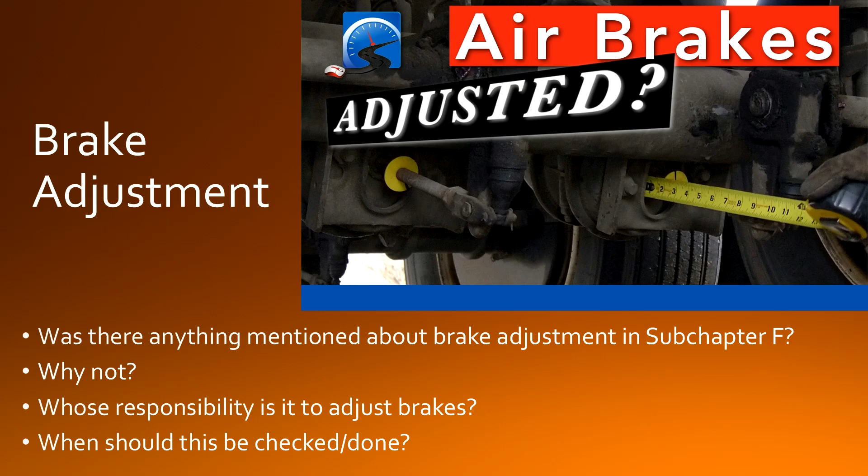While we're on the topic of automatic slack adjusters, there's a bulletin, BI 07-3, that points out you don't want to just manually adjust an automatic slack adjuster. That can cause problems because, one, it hides a problem that the automatic slack adjuster is not adjusting like it should. Furthermore, some drivers like to keep them a little tighter than maintained, even though they were in spec. That frequent adjustment will wear out the internal mechanism and cause the slack adjuster to fail or stop adjusting prematurely. So for automatic slack adjusters, which have been on vehicles or required since '94, you want to make sure they're in stroke, within the applied stroke range for the size or type of brake chamber.

But if they are, you don't adjust them any further than that. As long as it's acceptable within specs, you leave it where it is. If it's outside of those specs, you want to look into why it's not adjusting properly—is it a setup problem or is it a failed automatic slack adjuster?

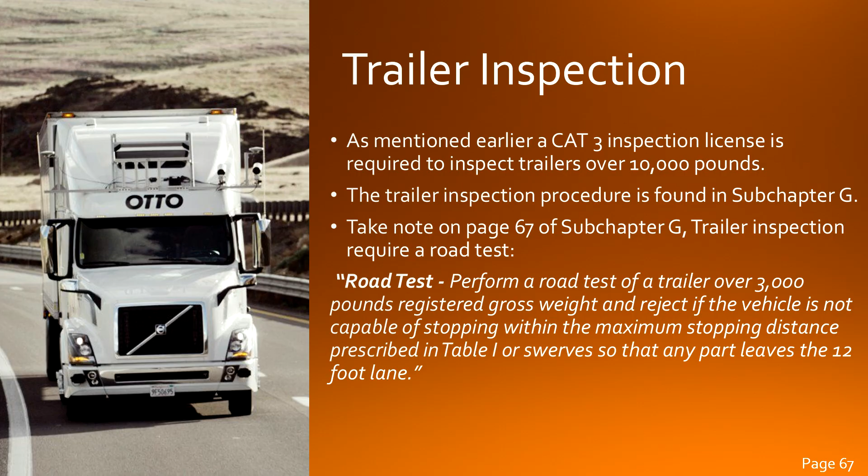It's not part of this chapter, but obviously this license allows you to inspect trailers over 10,000 pounds. Trailers are found in Subchapter G. I always like to point out, on page 67, the road test portion: trailers require a road test. Any trailer getting a PA safety inspection sticker, no matter the GVW, requires a road test. It says to perform a road test of a trailer over 3,000 pounds registered gross weight, and reject if the vehicle is not capable of stopping within the maximum stopping distance prescribed in Table 1 in the back of the book, or if it swerves so that any part leaves the 12-foot lane. That's really the only thing we're road testing on trailers. And by the way, trailers under 3,000 GVW do not require PA safety inspection.

So as a review, I'm hoping you can go through and answer these questions. I don't really want to answer them for you because that takes away some of the value. Feel free to pause the video and see how many of these you can answer, and go back into the training as needed.

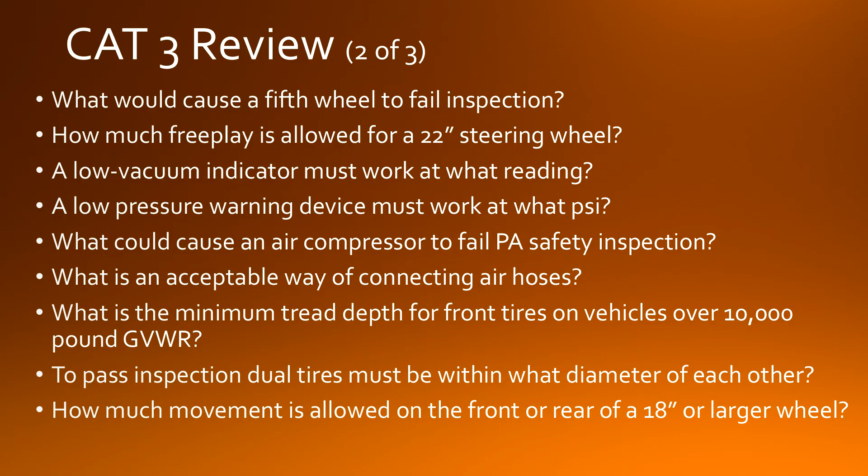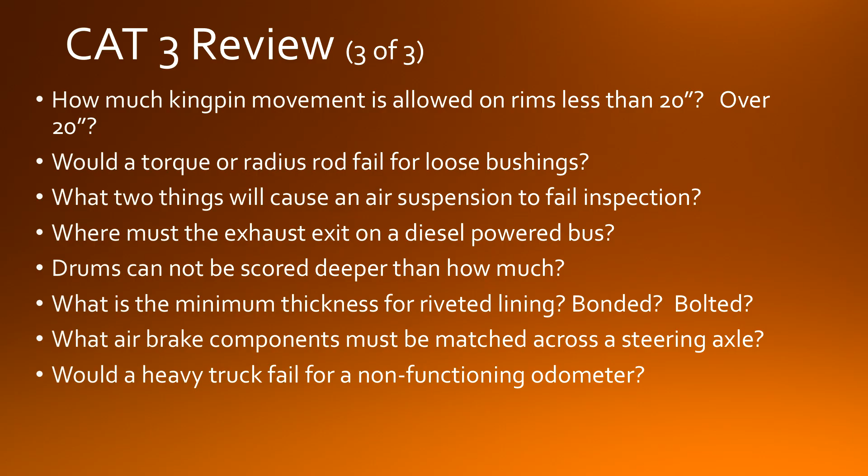This concludes the training. I hope you found this useful, and I wish you well in your efforts to inspect Category 3 vehicles as part of the Pennsylvania Safety Inspection Program.